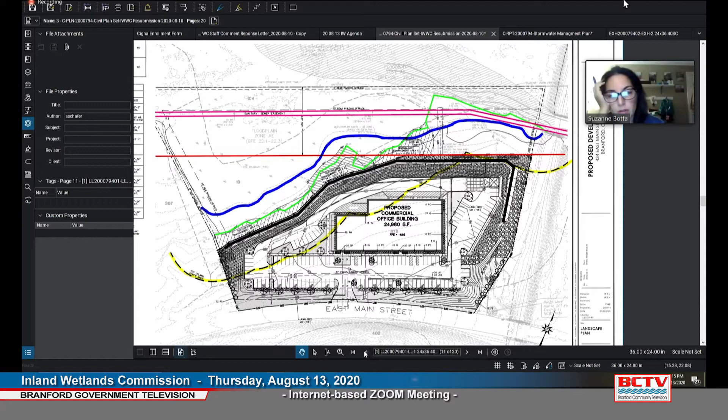Excuse me for a second. Sorry, this is Commissioner Botta. So you said deep sumps. Can you take the time and get more specific about what your stormwater management is, instead of saying things like deep sumps? If you would specify what is on the plan, that would be helpful.

Absolutely, Commissioner Botta. So I'm going to just move to the grading and drainage plan here. It's a little bit more clear. So we have a series of catch basins in the parking lot. This catches rainwater that falls directly onto the lot.

So catch basins, I'll just circle a couple of them, are here in yellow. So these are the first point of contact where rainwater falls from the pavement into the system. The catch basins are precast concrete structures that have pipes that lead to each other and eventually to this system. I'll just highlight those real quick for you guys. So piping here, here, here, sorry, a little crooked, and eventually discharges in this direction.

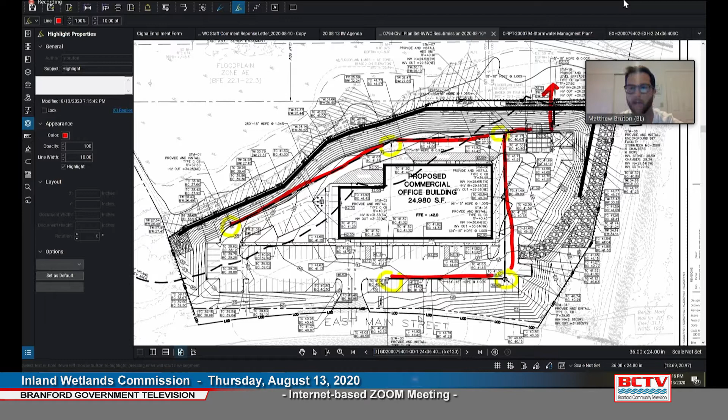What I mean by deep sumps and hoods is when the water falls into these structures, you want a space between where the inlet of the pipe is and the bottom of the structure. That is 4 feet deep. And I'm going to just try to find it on my details real quick to give you a better picture of what that looks like.

Let's see here. Sorry, going a little slow. Okay. Sorry, computer's spinning a little bit. Let's see. Okay. All right.

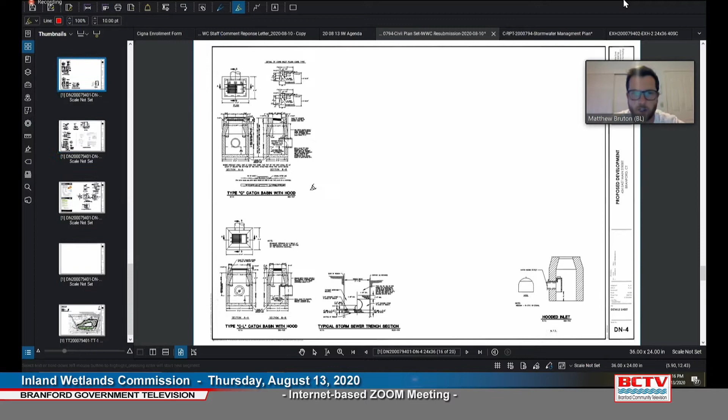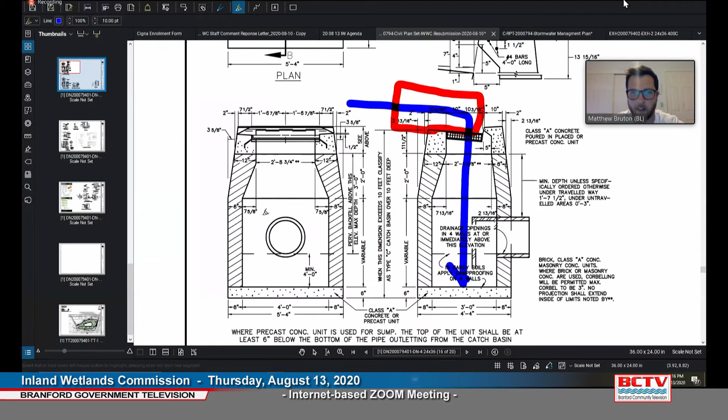So here's a cross section of a catch basin. So when you drive around commercial parking lots, you would see this right here. This is where your car would be parked next to a curb. Water in blue would come across the parking lot and fall down into this structure. What I mean by a sump is this area here, this area beneath the inlet that would fill up with water prior to it leaving through the pipe.

We have called this out as a 4-foot minimum. That is what's recommended by the Connecticut Stormwater Manual. This is a volume in an area that when stormwater falls into it, this is the first flush. You're getting trash, you're getting sand, you're getting salt, all of that you don't want migrating downstream. So the first line of defense is this sump.

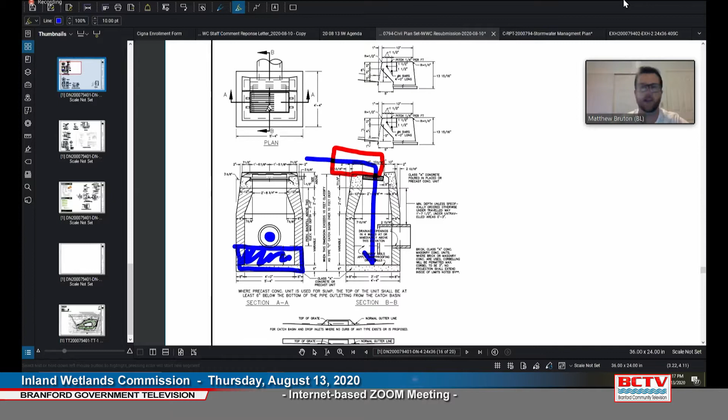This sump is going to capture those things, and this is an easy access point for the applicant to pop the grate on top and periodically suck out all that stuff as it builds up every season, spring, winter, fall, things of that nature. So that's what the sump is. The hood is also a feature that's part of this catch basin that helps keep the things that get trapped in the sump from migrating up and through the pipe and down the system. So that's actually highlighted here by this.

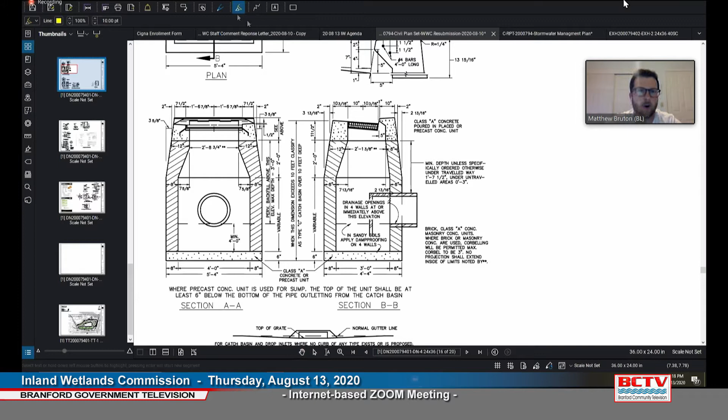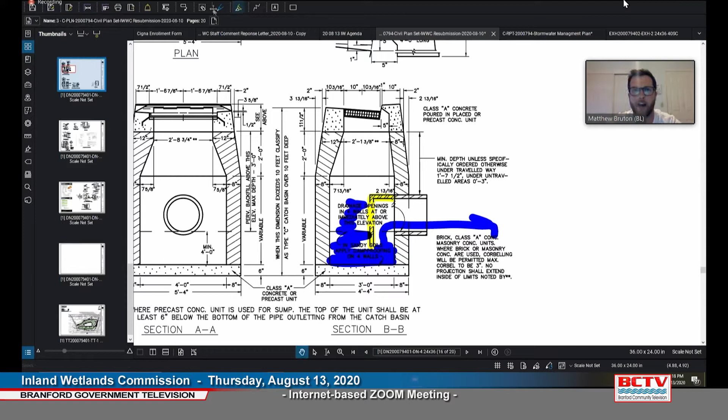So the goal of the sump is to obviously fill up with water. As it fills up, it'll spill and leave. This will obviously fill up quite high during storm events. And we all know that trash or leaves would float or fall to the bottom. The goal of this sump is to not have trash or anything that's floating to just flow out with the water as it fills into the catch basins. You get sediment along the bottom and you get trash, and it would be blocked by this hood.

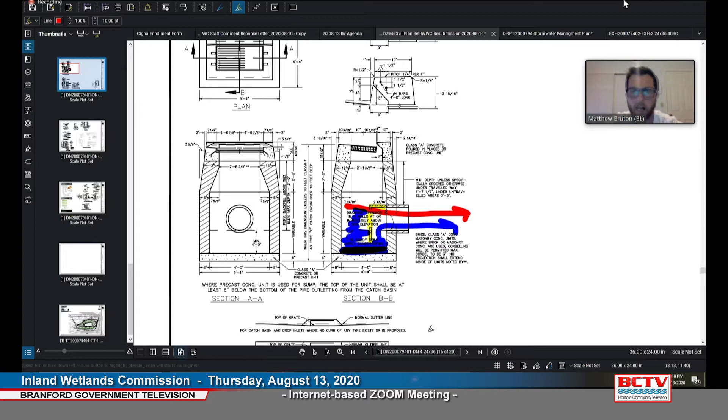So those two features of a catch basin are recommended by the Connecticut Stormwater Manual as the first line of defense on a stormwater management system. The next is I described a hydrodynamic separator. So this is another precast concrete structure that is put in the treatment train prior to getting to the subsurface drainage system. So you'll see here, water would be flowing in this direction and eventually out this direction.

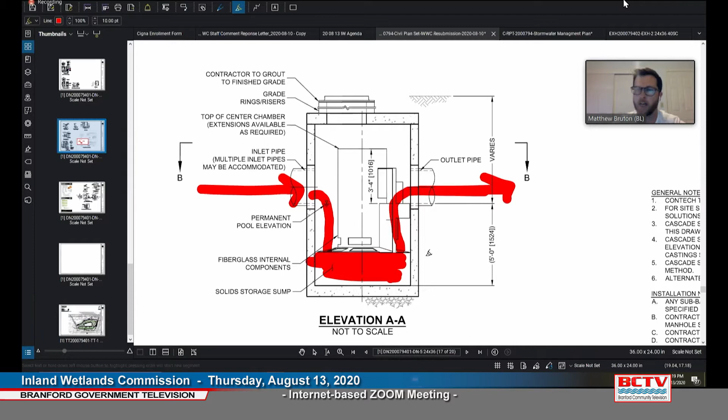The goal of this is similar to the sump. Water falls down in this and gets trapped in this area here to keep any sediment that has migrated through the system further than the sumps and the hoods and captures this in a greater quantity down here. And then water will rise and leave the system as well. So this is always a belt and suspenders system. Every device along the treatment train provides more and more quality to the water. So when it eventually discharges, it's clean.

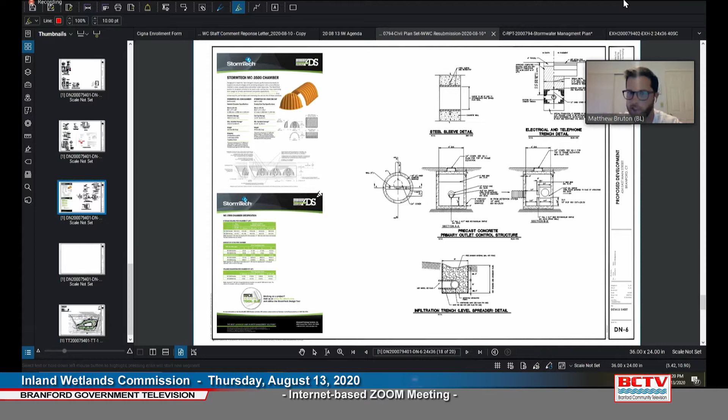And the clean that I'm speaking about is 80% TSS removal. TSS stands for total suspended solids. That is the standard that the state requires us to design our systems to. The last system is the underground detention system. It's underneath the parking lot. We're doing that to maximize the space on the lot to get the building and parking lot where we need it. So I'm going to just show the cut right here.

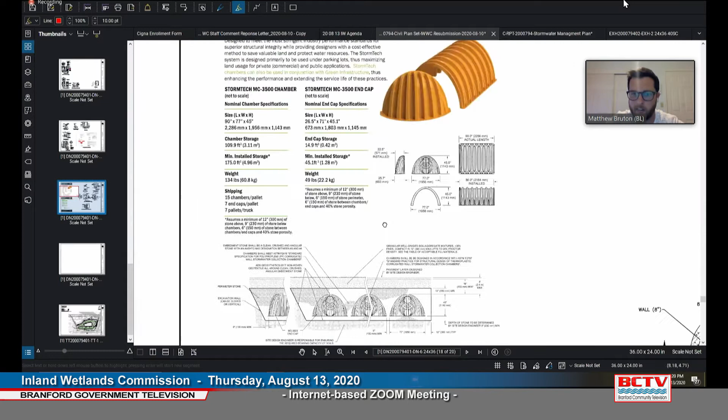So it's a chamber system that's shown isometrically here in yellow. So this would be the pavement where you would stand if you're a person, or a car, you could park here, and it would be beneath. So the water would flow into this system and fill up. The point of this system is truly peak flow mitigation.

We're adding pavement to the lot. So hypothetically, it's not mitigating into the soils as it does now. So we are not allowed to let water rush off this lot without capturing it and slowing it down. If we had residential abutters or commercial abutters, you'd obviously want this because you don't want to flood out your neighbor. You can't pave this and then just let it go and he's out of luck.

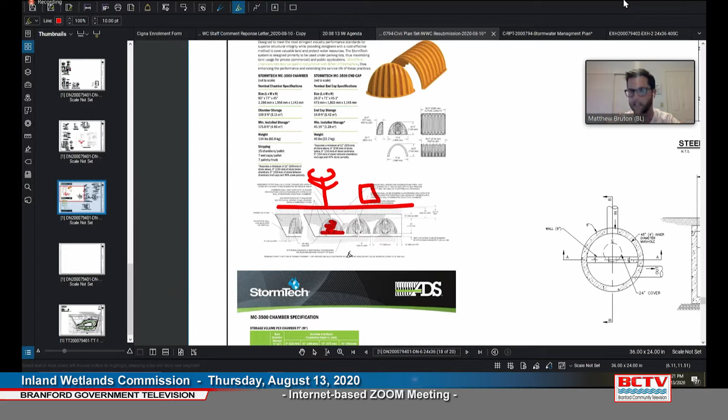In our case, obviously, it's not flowing to a developed lot, it's flowing to the wetland of the river. The goal of this is obviously to not drown out the wetland of the river. You want to match those peak flows so the wildlife, the vegetation, all that stuff gets the water that it's historically gotten, and you're not going to wash anything out from an erosion standpoint. So I'll flick back to the grading and drainage plan, Commissioner, so I can show you where each of these components are.

Ooh, too far. Oh, sorry. Trigger happy today. Oh.

Okay, so the catch basins with the deep sumps and hoods are circled in yellow. The last hydrodynamic separator is the structure right before the underground system. So you got catch basins and sumps, pipes, hydrodynamic separator, and then I will change colors here. This is the size and volume of the underground system. From there, it's piped out to the level spreader.

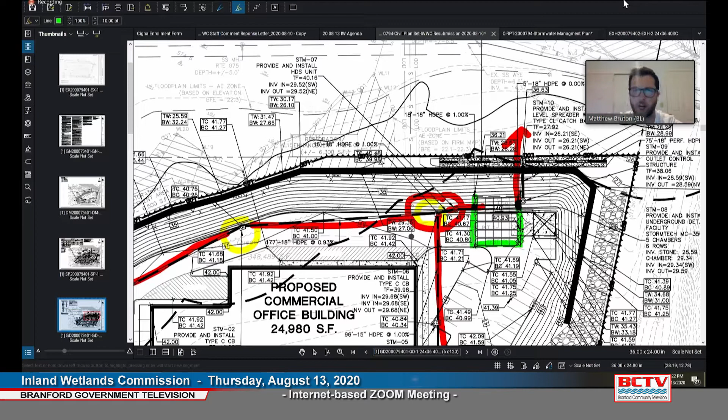The level spreader is a device that takes a point discharge from a pipe. Water would be rushing out of this system. You don't want that. You don't want this point system because it'll cause erosion as water sheet flows to the river into the wetland. You want to spread this out so water is dispersed evenly and not causing any erosion issues, especially at the bottom of a retaining wall, especially in a landscaped area adjacent to a wetland.

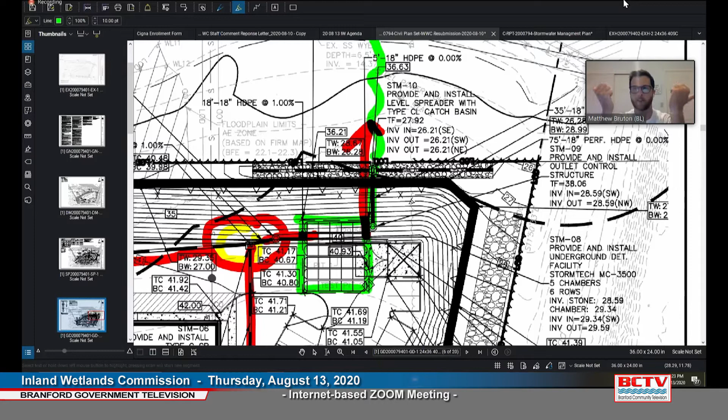So as water discharges this underground system, it comes to this structure here. It's going to go left and it's going to go right. This is a perforated pipe and a stone trench. So water will go left and right. Once this pipe fills up, the water is going to bubble up to the surface and then trickle down to the wetland. So that is the system at the base of the retaining wall here. All of these things, Commissioner Boda, comply with Connecticut Stormwater Manual and your local regulations for stormwater management. Does that answer your question?

It's more specific. So I'm assuming you're going to continue. I'm wondering about any infiltration that you are planning on the site. Yes, good question. Yeah, so during our initial discussions, I believe with this board and the town, we were looking at infiltration practices to recharge groundwater.

That's a common request. It's great to do if it's possible, but it all depends on topography, soil types, and historical high groundwater. So before we got into this design, we did test pits on site with the applicant to see where groundwater was. They were done in the proposed location we are shown here of where our subsurface infiltration system is. Based on those test pits, and obviously with a gut check of being next to a river and also next to a wetland, the groundwater was discovered at 27 feet of elevation.

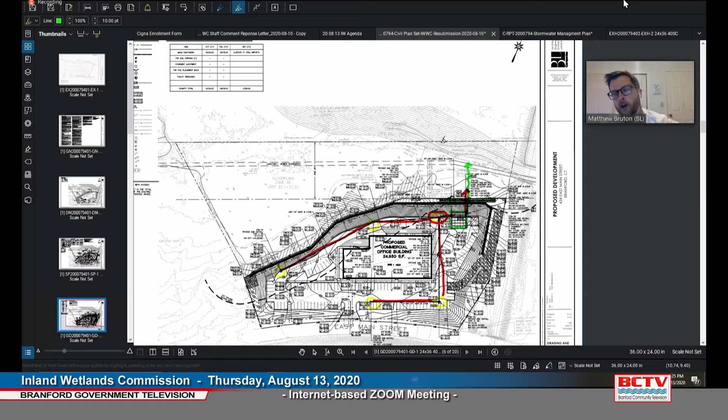And you said, this is Commissioner Boda, you said the test pits that you did were exclusively in the northeastern portion of the property? Correct. We did them all roughly in this area here. And we did that because the Connecticut Stormwater Manual wants us to not only clean stormwater and mitigate peak flows, but they want you to match discharge points.

So all the water, as I explained earlier, right, we have elevation 40 by the street and 20 at the rear of the lot. In general, everything goes this way. So testing along the front doesn't really do anything because water needs to discharge in this area here. And if you put a system in the front, you're not going to be able to get it to the back. So everything needs to be done along the rear of the lot to get it to its eventual home, which is the wetland and the river. And we obviously didn't want to go into the wetland to disturb any of that. And obviously, you guys know wetlands, water is either at the surface or right below the surface.

You can, this is Commissioner Boda. You can continue. I'm not sure where you were gonna go next, but we'll have more questions later.

No problem. So just continuing on, part of our set also, which would be important to this board, we did provide sediment and erosion control plans and a narrative. So these are devices that would be installed during construction to protect the street, the wetlands, any existing systems adjacent to the property from erosion during construction.

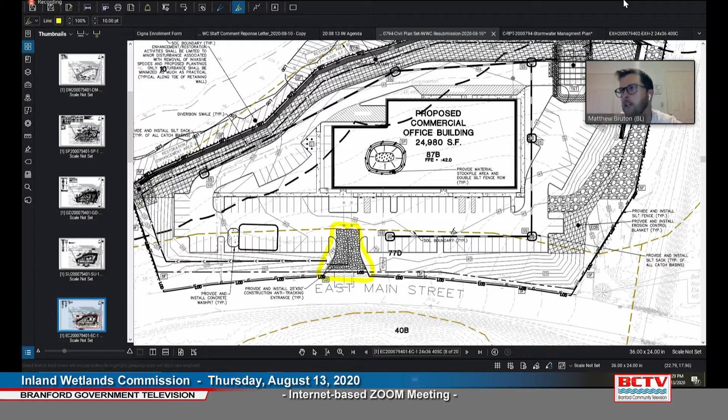We've also provided erosion control blankets. These are temporary stabilization methods that are rolled out onto slopes. We show them here by this cross pattern. So we show them in areas of 3 to 1 because that's obviously an area that's prime for erosion because of the steep nature of the slope.

These are blankets that are laid out to capture and keep soil from moving until vegetation can grow in. So we have proposed those in several locations on site in the areas of proposed steep slopes to make sure soil does not move during construction.

Another item. Excuse me, this is Commissioner Boda, can you clarify the erosion control blankets? What kind are you using? What is the material that the erosion control blankets are made out of? Let's see here. Let me see if I have it here.

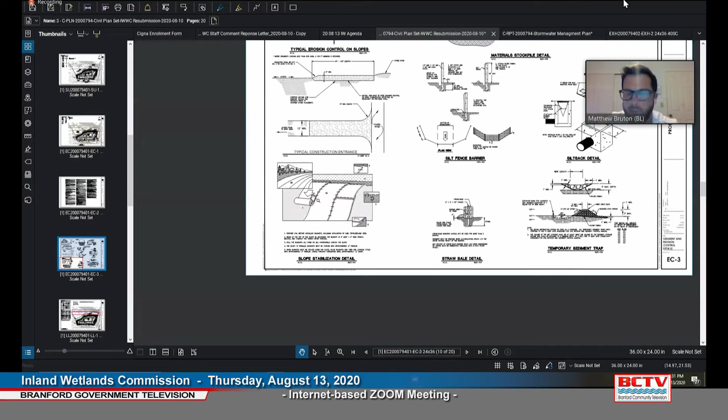So here's a detail on sheet EC3. This kind of gives you an idea of how they're installed in a 3D fashion, right? So they're blankets that are rolled down the slope, overlapping and stapled together in a pattern similar to this. That would remain until everything is stabilized. Let me see if I can find the type.

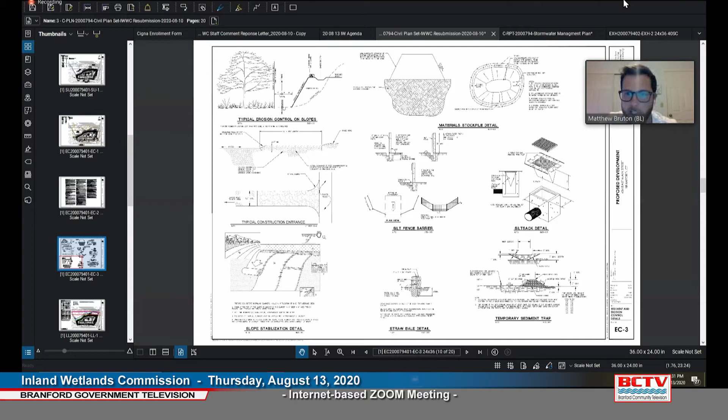There's obviously dozens of different manufacturers and products and companies that provide different things. I don't know off the top of my head, Commissioner Boda, but I can surely find it for you by the end of the meeting if you don't mind. That works. Commissioner Boda. Okay.

Again, while I've interrupted you, if you would talk a little bit about the maintenance schedule, you said periodically, and if you would clarify what you mean by periodically, including the anti-tracking pad and the silt sacks, what triggers cleaning out, and then generally what is the maintenance schedule?

Yep, absolutely. Great question. I am flicking now to our stormwater management report. That is, you see down here, almost 300 pages. The first half of it is the stormwater calculations that the town engineer reviewed in terms of peak flow mitigation and things of that nature.

The back of it, we provide a stormwater operation and maintenance plan. So this is a plan that is followed during construction and also should be followed by the owner applicant moving forward after the site is constructed. So let me just skip through here. So there's a brief narrative on the description of what I'm speaking about in the plans that you saw right now. But I'm going to skip forward a little bit here.

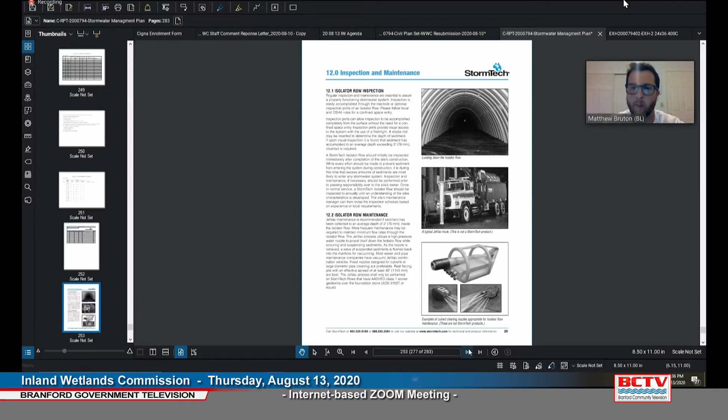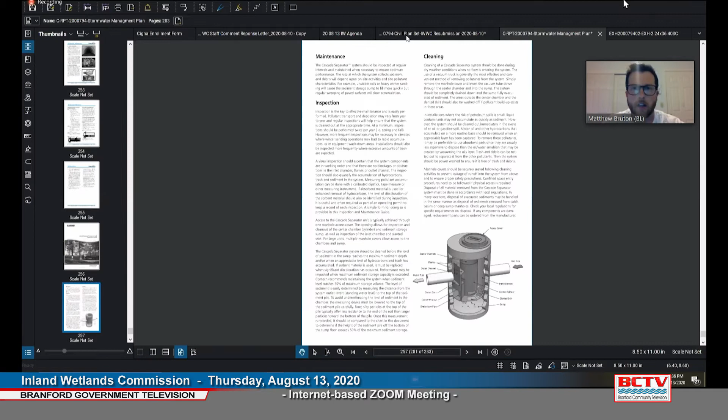This is a cut sheet from the inspection and maintenance manual for StormTech, which is the chambers beneath us, some of the devices that are used to clean and jet out that system per manufacturer's recommendations. Same thing with the hydrodynamic separator. Right, some of the devices here, manufacturer recommendations. If I go back to the plans, I will show you something else as well.

All right, so this is a detailed narrative. It has items like construction sequence, operation and maintenance requirements, grading operations, maintenance of sediment and erosion control measures. So I'll just read out a couple sections if this will be helpful, Commissioner Boda.

Siltation fences shall be inspected minimum weekly or after each rainfall event. All deteriorated fabric and damaged posts shall be replaced and properly repositioned in accordance with this plan. Sediment depositions shall be removed from behind the fence when they reach a maximum height of 1 foot. Talking about the same thing with hay bales, talking about sediment traps. What else is a good system here to point out?

Excuse me, Commissioner Baxter. Are you reading from EC2? I am reading from EC2. If everyone wants to follow along, I know I'm kind of moving pretty quickly with my mouse.

Last note: maintain all permanent and temporary erosion and sedimentation control devices in effective condition throughout the construction period. Upon completion of work, sweep parking lot, remove all temporary erosion and sediment control devices when authorized by the authority having jurisdiction. So in this case, we would be coordinating with Jamie to make sure this site is stabilized not only in our eyes, but also in the jurisdiction's eyes. So nothing is prematurely pulled out, which would allow erosion to happen and damage wetlands downstream.

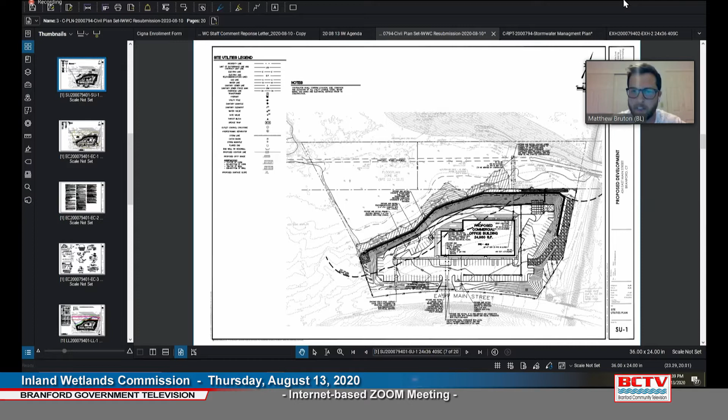Let's see. In terms of utilities, all the available utilities, water, sewer, gas, electric, telephone are available either in the street or on site. Most of the utilities are connected to East Main Street with the exception of sanitary sewer. There are no sanitary sewer services in East Main Street. If you remember from the beginning of my presentation, there's a sanitary sewer easement that runs along the back of the property. We are showing a connection back here.

It is ringed with erosion control devices, and it does stay outside of the wetland. So we are not proposing any direct wetland impacts for this connection. Obviously, if we connected in any other way, here, we'd be cutting through the wetlands. Nobody wants that. We know that would never fly. So we found a location that stayed within the upland review area and reached that connection point. Just wanted to point that out to you guys.

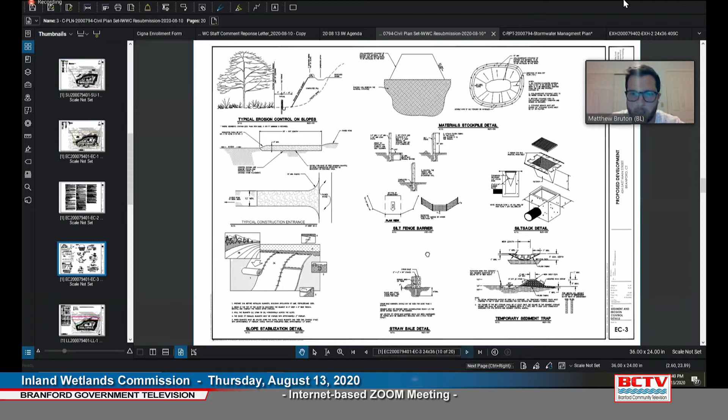I'll let David Lord speak to this when we get to him. We also have provided restoration areas, I believe, which were talked about potentially during the site walk, along the base of the wall, between the base of the wall and the wetland area, that's depicted by an enhancement area here, here, and here. So that's my quick-ish presentation.

Just want to recap, we have no direct wetland impacts. We are in the upland review area where we are severely hobbled by some existing conditions on the site in terms of easements, wetlands, FEMA flood areas, and we're matching the constraints of your regulations in terms of maximum height of retaining walls and slopes. We think this is a great use of the property that really only 50% can be used in a commercial district. I'm happy to answer any questions, but I'm sure you do want to speak as well to the applicants and the wetland scientist. So I will leave the plan up and stop talking.

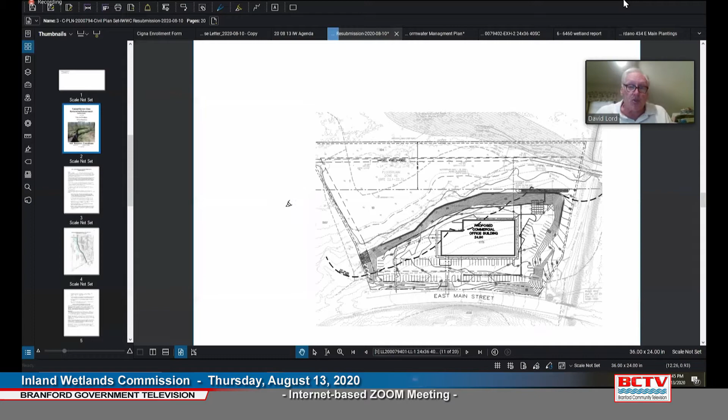I've called out 3 separate restoration areas, basically due to their difference in existing vegetative cover, their location relative to the utility line right-of-way, where we have some height restrictions, and the center restoration area, which is restoration area B. We're also proposing to take some invasives out of the existing wetland vegetation and plant some native shrub species as well as tree species into those areas.

Beginning on the second page of the plan, there's a construction sequence which follows step by step how these areas will be restored or enhanced. I'll give you a short overview of that sequence. In the areas we will go in, I will mark all of the invasive plant species that are to be removed. The removal will be done by hand. We're attempting to minimize the disturbance of soil.

The existing trees and shrubs will be cut off at the ground. The root systems will be left in place. They will be treated with a systemic herbicide to kill the root system to prevent regrowth of the invasive species. And then in existing open portions of the restoration area, such as that grass area that's on the cover of the plan, is where we'll be doing the plantings of the trees and shrubs, which we'll get to in a moment.

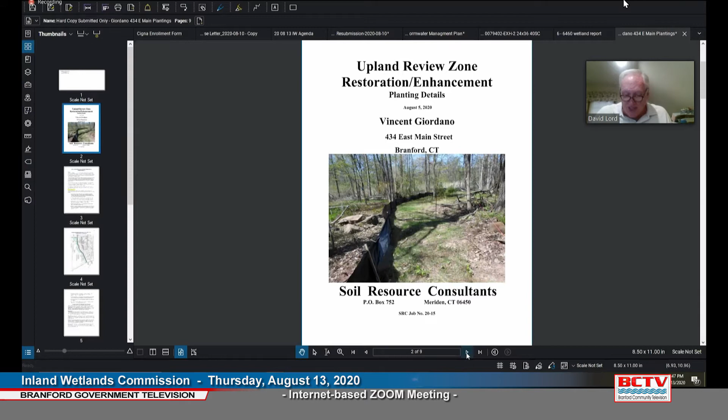The 3 areas that are proposed for restoration enhancement are shown on page 2 in the green crosshatched area. On page 3, there's a description of the 3 planting areas A, B, and C, and a description of how the tree and shrub species were selected for this project. And on page 4, there's 3 columns, A, B, and C, which shows you species composition, height of the plant to be used on this site, and the numbers in each of the restoration areas.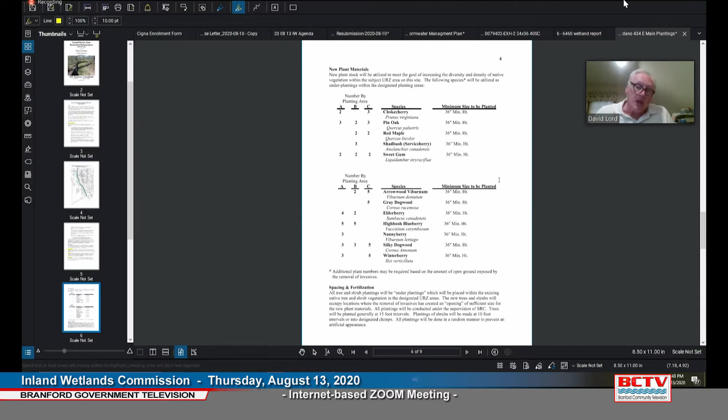Now, one difference in this particular type of restoration plan, we may need to use additional plants of these species based on the number of invasives that we encounter in each of the restoration areas. I have not done a detailed inventory of how many individual invasives we're going to be pulling out. I have this list prepared on page 4 to give the commission an idea of what we're proposing in each of those areas, and for lack of a better description, a minimum amount of trees and shrubs that will be put into each of those restoration enhancement areas.

It's quite possible that additional trees and shrubs will be needed in each of those restoration areas, again, based on the number of invasives that we'll be taking out of each of the 3 areas. You have spacing and fertilization recommendations. On page 5, you have permanent and temporary vegetative stabilization seed mixes, which will be used for bare soil areas, which we are proposing to keep to a minimum in the removal of the invasives and the planting of the new species. There is a description narrative of the New England Conservation Wildlife Mix, which is the long-term no maintenance seed mix, which we will be putting into the enhancement areas.

And lastly, there's a maintenance and monitoring program similar to other plans I presented to this commission, with the exception that this one has more details on how the invasives will be removed prior to the planting that is proposed within the different areas. Your standard requirements for these types of plans are the inspection, sequence, and monitoring period of time, and the minimum threshold of 85% for all trees, shrubs, and ground cover that are planted in here to be maintained throughout the life of the post-completion inspection period.

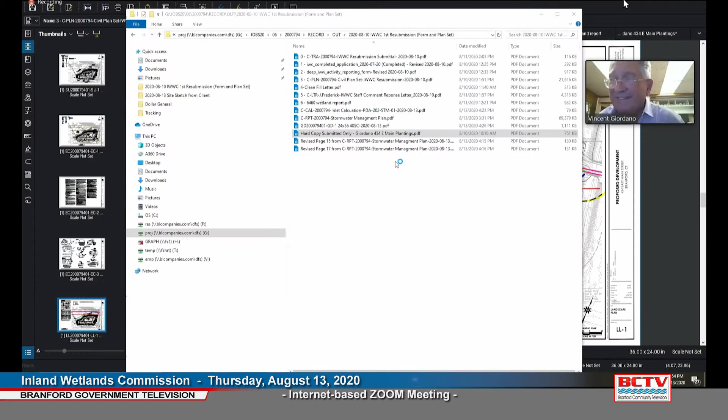This is Commissioner Basserman. Mr. Giordano, the large mound, a large pile of soil that is on the site, can you speak to the condition of that material? That material is virgin red rock type material, sandy, reddish rock material that's been pulverized. 100% of it came from Prospect Hill over at Yale University during the development of the Yale Science Building. We were the site contractors on that particular building that has just been completed and opened.

We had to excavate and remove a total of 120,000 cubic yards of all this red rock virgin material in order to get the two-level sub-basement for the new building in. A portion of it came to this site. The vast majority of it went to other sites around the city and even Yale-owned sites. Like I say, it's all certified virgin, clean material.

And I assume, this is Commissioner Bassman, that the letter that I'm looking at on the screen attests to that clean fill? That's correct. Okay. Thank you. We couldn't move it. Like I said, it was 120,000 yards that went off site, and we couldn't move any of it to the locations without this type of analysis and certification for that fill. Thank you.

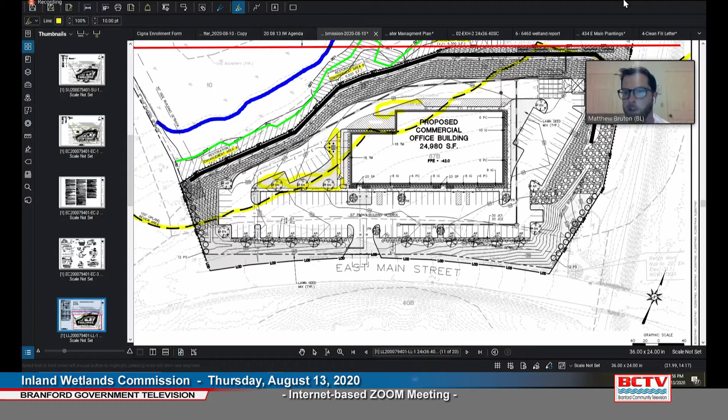There's a large one in this corner here between the loading spaces, and also a wedge here against the building. There's also small landscaped areas along the perimeter as well. As we all know, living in New England, if there's a massive storm that does require extra snow to be stored, we do have a small excess of parking spaces, so those could be used as well. If it's a monumental task with snow that inhibits use of the property, the applicant would look to possibly collect it and move it off-site.

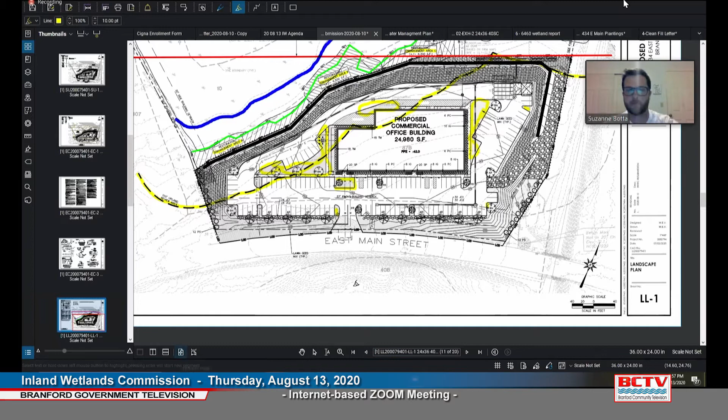This is Commissioner Botta, is that documented on your plan? Let me see. It's a response in our letter back to town staff. Let me just see if it's on this plan here.

I don't know if it's specifically called out on a plan, but it's in writing to the letter responding back to Jamie. A note can surely be added to the plans though, if that's required.

Yeah. This is Vincent Giordano again. I can also speak to the emergency requirement to remove snow from our properties. As you know, we own Branford Building Supplies here in town, and with all the lumber piles and everything else there, there's very little room to store snow. So we always have the facility and the ability to remove snow from the properties if that becomes the requirement. On a site like this, there are a number of areas, but if we have to move it, we move it.

Yeah, so this is Commissioner Botta. I don't think the general practice of needing to remove snow from the site is... Right. That's what I'm getting at. It's more an issue of ensuring that it's not pushed back to the northeastern section of the site, and so as Mr. Bruton just mentioned, if it's going to be in those landscaped areas, that would be added to the application, the site plan. That's helpful to have so that it's documented.

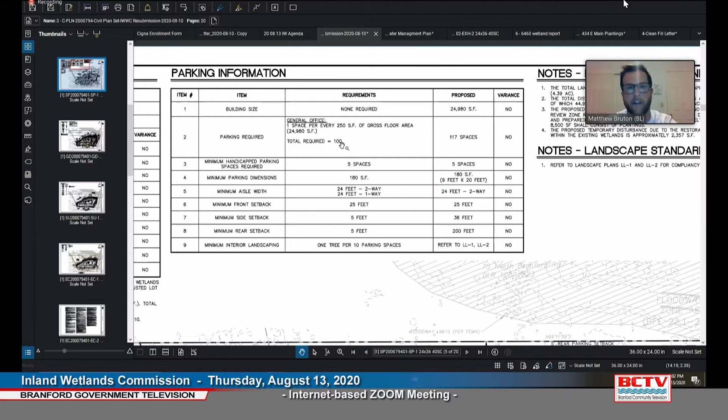We are providing 117. Based on the fact that we don't have a defined signed tenant at this time, we are asking to leave the little bit of excess parking spaces as our ability to attract a vibrant business or businesses to the lot. We understand that it is slightly above requirements, but since we don't know who the end user will be, we're looking for a little bit of flexibility to make sure we can attract a viable business to this site. Obviously, in the future, if the building shrinks or tenants are vacant or that demand is not needed, we could remove spaces as necessary.

Commissioner Botta. I think the likelihood of that parking ever going back seems exceptionally unlikely. And so I am wondering if you might consider doing a reserve that is potentially more pervious than not, something like pavers, that would allow any potential tenant to see that this is a space that could be converted into parking, but at the same time, we are minimizing the impervious if it's really not necessary.

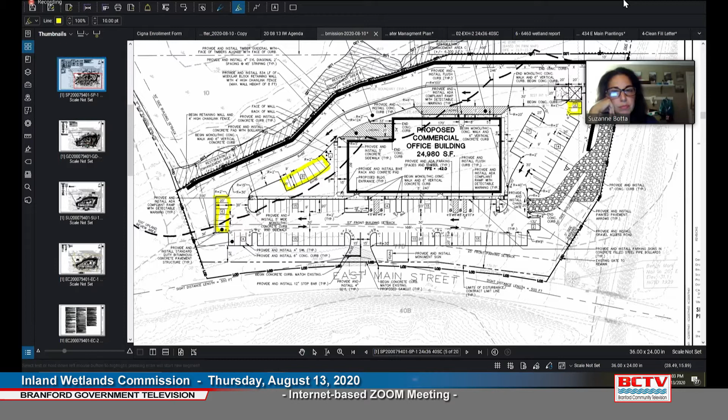Vincent, are you okay with that? I think we could definitely designate some areas that are farthest from the building that could be shown as future parking if needed and left in the natural landscaped setting for now, unless they're needed. In the meantime, they'd be green space as Commissioner Botta is requesting. This is Vincent Giordano. Matt and Commissioner Botta, I have no problem with showing that. Good. I think I'm okay for now.

This is Commissioner Basserman. Mr. Bruton, can you talk a little bit about this diversion berm? Looks like it's going to be put in as part of the construction sequencing. Yeah, so you're looking at EC1? Correct. One second. Oh, too far. So again, Matt Bruton, engineer from BL Companies for the record. What we call out here is this diversion swale. I'll highlight it in color here so it pops for you guys. So it's lined in this fashion.

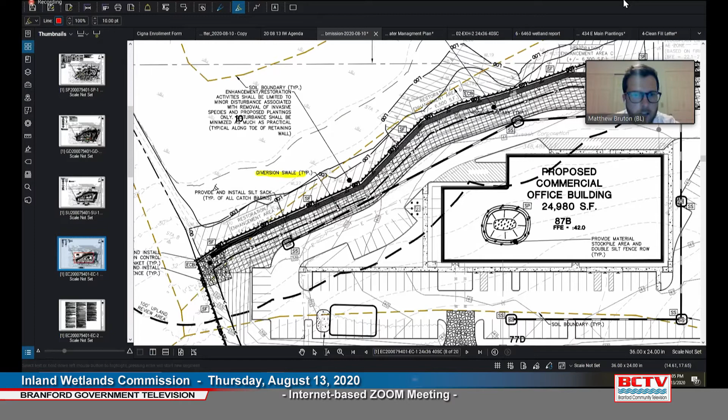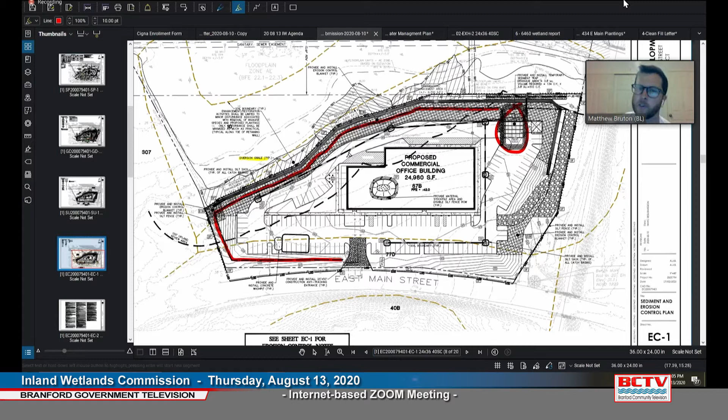So as you are aware, we're proposing to fill the rear of the lot by constructing this retaining wall, raising the back of the site up to make a level pad. So we have a retaining wall, 3-to-1 slope up to the paved area. Eventually, when that is further along and the stormwater system is in place, that would be used to capture rainwater that falls during construction to clean it and mitigate it and discharge it to the appropriate spots.

But before that happens, between clearing of the land and as the lot is being raised with earthwork, you want to make sure water is being diverted to correct spaces, captured and treated and cleaned before the structural devices are installed. So what we show here is a diversion swale. That is a rough grading that would be put in as the lot is filled up and the retaining wall is constructed. It'll do two things. It'll keep water from getting towards the retaining wall, so Mr. Giordano can actually construct the wall, but it'll also divert the water to a temporary sediment basin.

The goal of this basin, as you see here, is temporary. It's sized based on the drainage area that flows to it, and it's sized based on the Connecticut Stormwater Manual. So this is a basin that would be temporary in nature. It would be installed and modified as the site is raised up. And the goal of it is to collect sediment-laden stormwater, divert it to this basin so it can be settled out, and then clean water can be discharged downside of the wall back towards the wetlands and the river during construction.

Once the site is raised completely and the catch basins are installed, that would then take over as the means and methods to get stormwater out of the parking lot and back to the wetlands. So it's a temporary situation between construction and completion.

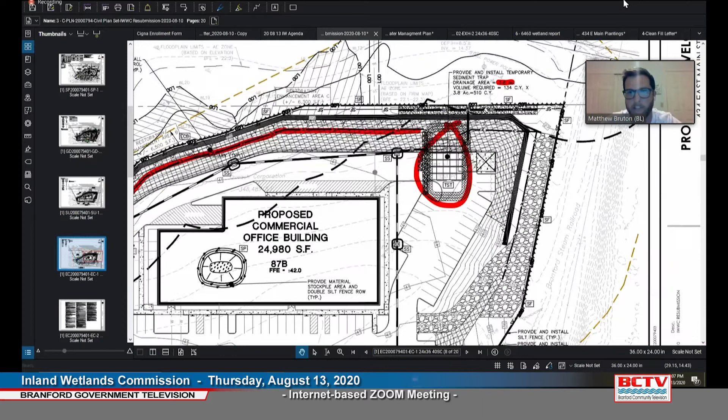Yes. So this will obviously depend on how the lot is raised and in what stages. To me, this is an area that would work as things are starting to be raised, but as the wall is constructed in this area, this diversion swale will be the main track to get water to this temporary sediment basin. So this is almost like an initial phase one to get some of this area stabilized. And then as the wall is constructed and the site is raised, the red line will take over as the main means to divert water to the temporary sediment basin.

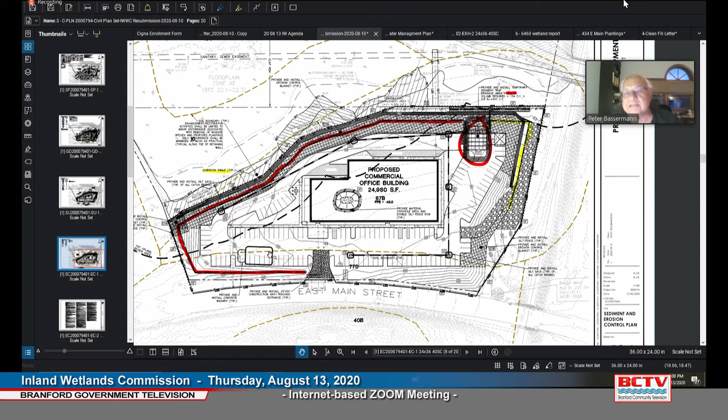This is Commissioner Bassermann. Do I understand that basin gets filled in when the wall has been completed? Is that what happens? Correct. Once the wall is completed and the earthwork is set, then we'll end up with this final condition here where the basin was roughly in this area here. That will be removed, filled in. You'll have paved, sloped landscaping, and the catch basins and piping will take over as the stormwater management system on site. Thank you. You're welcome.

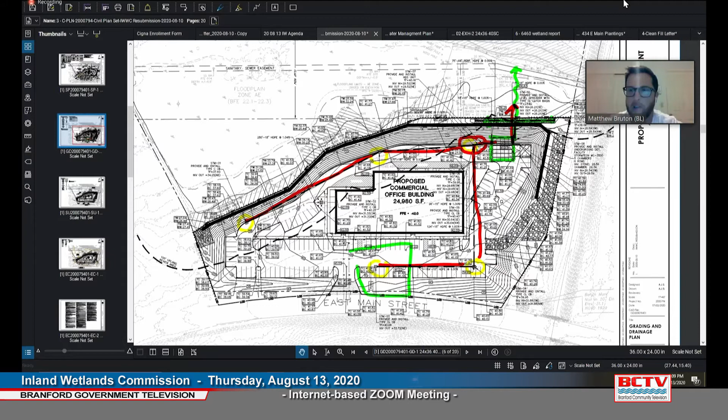This is Commissioner Begemon. A question about two things, and I don't know if it's appropriate to ask as I'm a new commissioner, but regarding the removal of invasives, which sounds like a good idea, the systemic herbicide that is proposed, what is that? Because we're right near a wetlands, and it's glyphosate probably. I want to know about that. And the second question is regarding the dumpster area. Dumpsters attract a lot of debris, and it's right at the top of the wall, and I don't know if there's something protecting debris from going down the hill from the dumpster area.

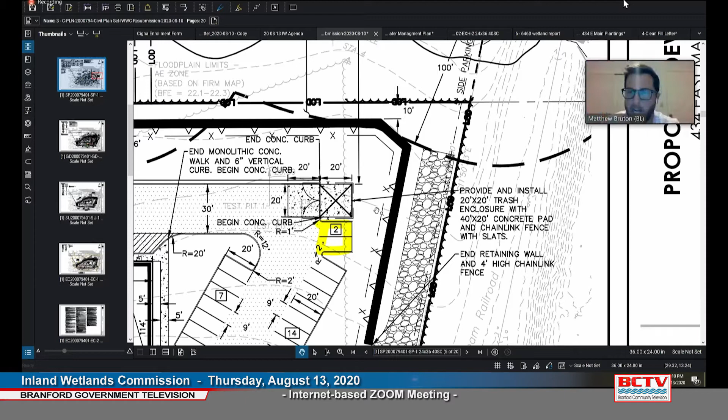I'll start with number two, and then David could do number one. Commissioner, the dumpster enclosure is here in this corner. It's a 20 by 20 trash enclosure on a concrete pad. It's enclosed with a chain link fence with vinyl slats. It's at the back of the lot because usually it's the most unappealing thing that towns do not want to see in the front yard. But it is enclosed with gates and a fence, so the dumpster would fit inside here. So the fence and the gate would act as a deterrent from debris blowing out of the dumpster and into the parking lot and potentially off-site down into the wetlands.

Jaymie Frederick, the wetland agent. It's my understanding that there will also be a chain link fence along the top of the retaining wall. Is that correct?

Matt Bruton from BL, yes, that is correct. I'll just quickly highlight that here. This little dash X line is along the retaining wall. It does two things: keeps trash from blowing over the top of the edge, and also keeps people from falling off over the top of the edge. So it's a win-win for everybody.

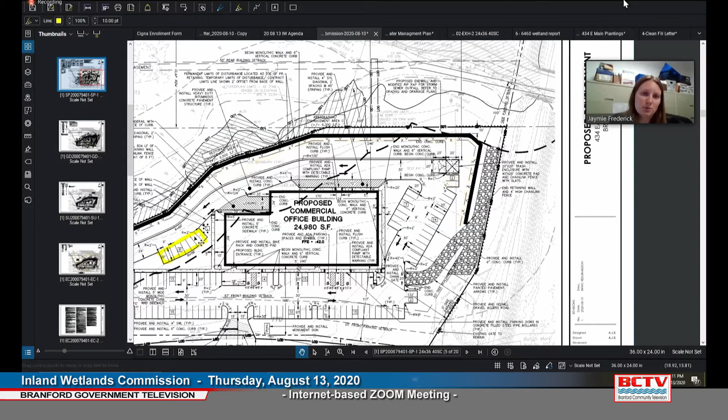Jaymie Frederick, the wetland agent. To go with Clarice's other question regarding the invasives management, do the areas extend into the wetland areas that are proposed to be enhanced? And is there any different treatment as far as seeding or plantings of the upland area versus the inland wetland area?

The herbicide that's proposed to be used is one that is licensed by the state of Connecticut, registered or labeled for use in this particular situation for this particular control mechanism. What we are attempting to do with the use of that is to minimize ground disturbance in the area where we are removing the invasives. There are mechanical means where we can get in and remove larger parts of the plant. Unfortunately, that equates to a larger earth disturbance.

So we're trying to minimize earth disturbance, cutting off the top growth, using the systemic herbicide, which kills the entire root system, but does not translocate outside of the root zone into the adjacent soil areas. It's very localized. It moves through the plant. It's absorbed by the cut surfaces, moves through the plant and kills the plant, but does not translocate out into the adjacent soils. Again, it would be done by a licensed professional applicator.

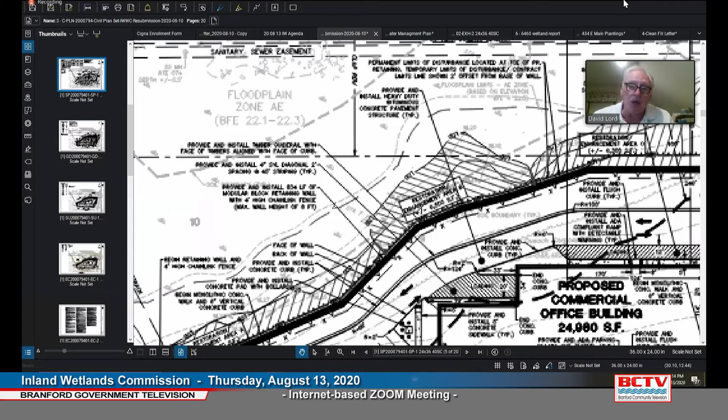The small number of invasive species that are within the wetland area in Restoration Area B, we can deal with by hand. If the commission would like, we can preclude any use of pesticides within the wetland portion of Restoration Area B. It's a very small area, but it is one that does have some invasives in it, does have some need for control. We can attempt to do that mechanically, continued removal of regrowth of stems during the 5-year post-completion monitoring period.

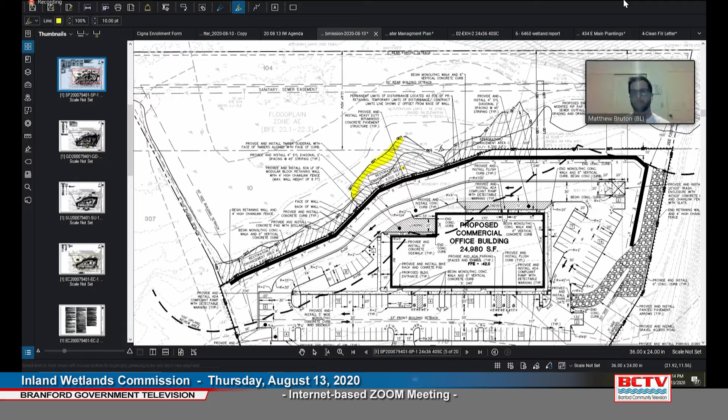Any other questions, Commissioner Bassermann? Any other questions from the commission? Commissioner Bassermann, again, this is actionable this evening, Jaymie? Jaymie Frederick, the wetland agent. It is actionable if the commission wants to move forward. It can also be continued to the next meeting, September 10th. It's up to the commission. The deadline without an extension is September 11th.

Mr. Chairman, Matt Bruton again for the record. As engineer, I know my applicant is very happy to work with the town on all items to make this project something that the Inland Wetland Commission is comfortable approving. Given the state of the soil stockpile as it is today, we'd love to get an approval from you tonight so that we can move on to planning and zoning to eventually develop this site and secure it more, so we could protect the adjacent areas and make this an economic driver for the vacant lot. So that's my 2 cents.

Right, and this is Vincent Giordano speaking here, and I would also second that, Matt. The pile's been there since 2017, and we've been able to keep it stable, and we've worked very hard at that. But there is a point in time where we certainly don't want to lose control of what's there. So the sooner we can get this approved and get moving on stabilizing or restabilizing that site, I think we're all better off. And as I said earlier, the timing is important for marketability as well. So it's a combination of aesthetics and also just site control and stabilization.

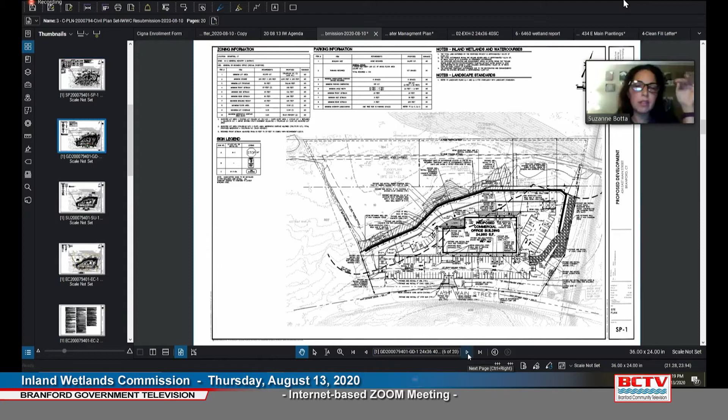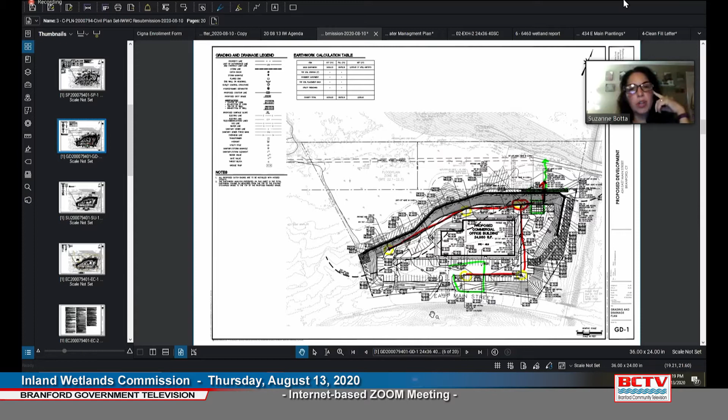This is Commissioner Botta. I have one more question, and it's really a curiosity. I'm wondering about the temporary sediment trap, and why we didn't consider something above ground or open in the end for long-term sediment and erosion control. So that's stuck in my head, and I'm curious about why everything was really pushed underground and tucked away until it's off-site. And I think that the state has really encouraged the daylighting of a lot of that stuff. So I'm wondering about the thinking behind that decision.

Sure. Again, Matt Bruton, engineer from BL Companies for the record. So the above ground basin, Commissioner Botta, obviously you can see that this is the temporary basin just circled here. That is an area in the final condition that would severely limit the development of this lot. An above ground basin could not go in this location. We have a retaining wall with an 8-foot max height here. We have a 3-to-1 slope here. That basin could not go in this direct location in the final condition.

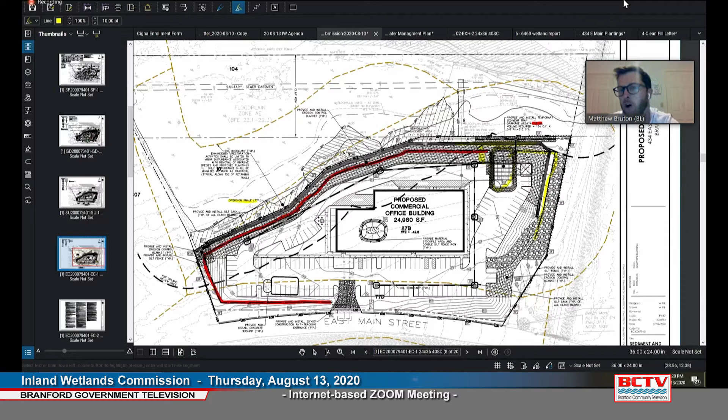It would have to be pulled further back off the wall and further off the slope that we're creating this flat pad site with. And doing so would also limit the size of the building and the number of parking spaces that we're allowed to provide. Based on the fact that 40-50% of this lot is already undeveloped because of the restrictions with the river, the wetlands, and the CL&P and sanitary easements, the applicant is obviously trying to make this project economically feasible by maximizing the usable area of the site to the best of his ability. Putting an above ground basin takes away from some of the area that we can develop.

With that said, the stormwater management system that we are providing, although it is underground, does meet the standards of a Connecticut stormwater management system that is required by the state in terms of water quality and peak flow mitigation. It's typically used when there's tight sites, especially something of this nature, where there's high groundwater adjacent to a wetlands, adjacent to a river, when you're trying to balance economics as well. I'm not sure if that addresses your question or not. It does. It answers my question.

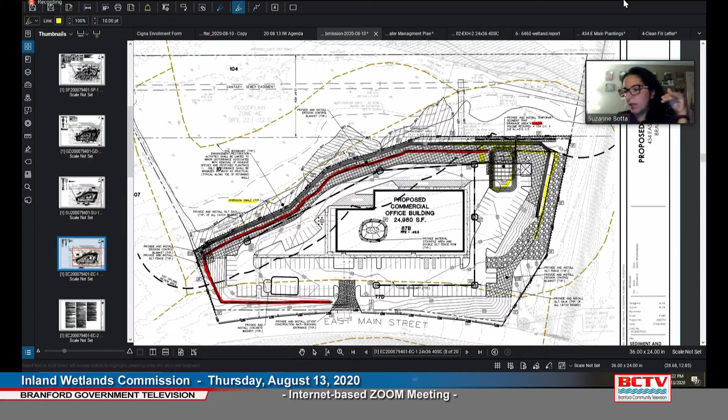This is Commissioner Botta. I feel relatively comfortable with the application. I think maybe can you talk a little bit about, and maybe we can pull up the peak flow, I would like to take a look at that. And do you have a hydrograph for the site in the plan? I can definitely find a chart really quickly. Hold on 1 second. A lot of pages there. Yeah, yeah. Let's see.

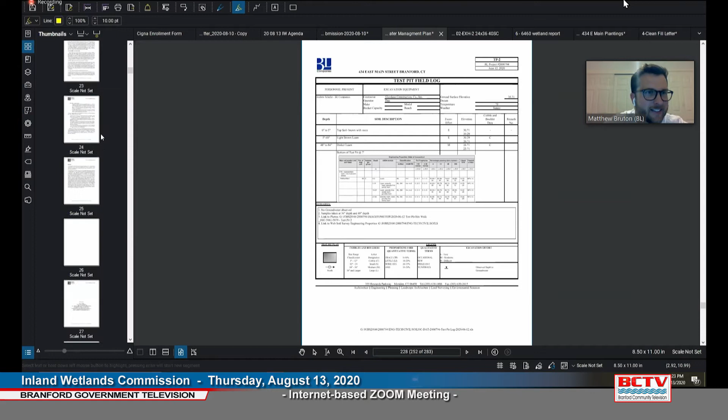So in the existing conditions... I just want to ask you a question before you continue. For your existing calculation, what did you put in for the ground cover? What did you use as the existing surface conditions? Yep, let me see if I can find that real quick for you. Stuck here, hold on.

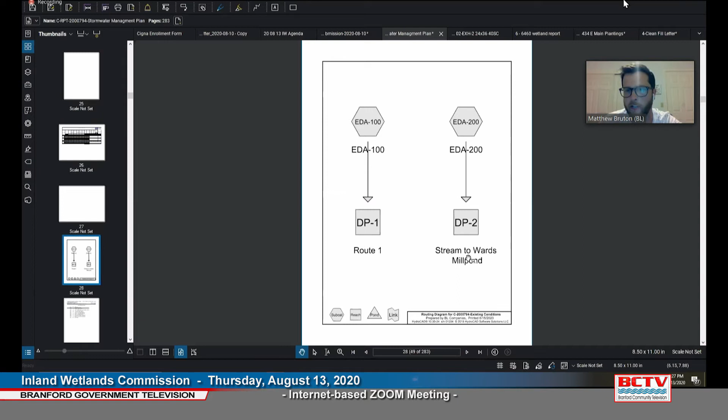So description of nodes here. So this is the variety of the ground cover that we have. Obviously, the largest area, we have anything from brush to gravel surfaces to a meadow non-grazed area. We have some pavement in the front, and then also we have wooded areas as well. The HSG, the hydrologic soil group, that is a description of the soil based on Web Soil Survey. It's a website that's put on by the government to classify soil types in the area.

So the HSG B, C, or D is in reference to the types of soils that are present on site, A being the best type of infiltration soil, D being the worst type of soil. So you can see that we have a variety of anything from B to D, depending on where we are on site. So this is the breakdown, Commissioner Botta, of the surface types. Let's see, computer is doing better now.

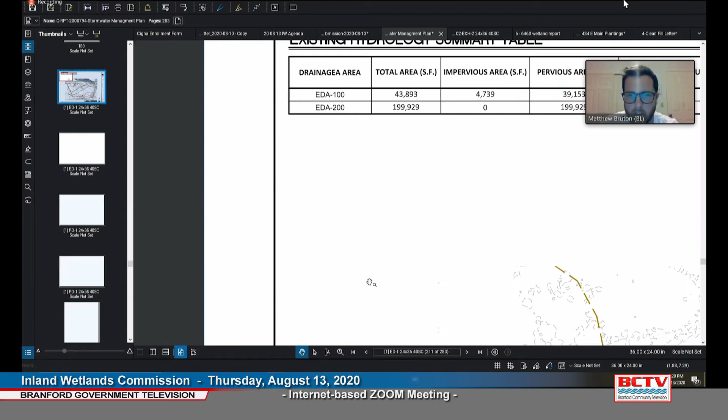I'm just looking for one more map I think would be helpful if I can find it. So here are the areas, right? So there's a small area that's depicted as EDA-100. That goes to the front area here. And then EDA-200 is the remaining area that heads back towards the wetland and the river. So we have some breakdowns here of total area, impervious area, pervious area, times of concentration. I don't know if that answers your question, Commissioner Botta. Yes.

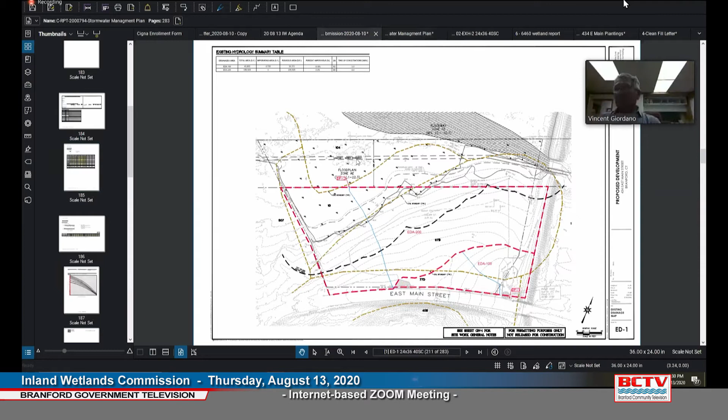Commissioner Bassam, is the commission satisfied with the conditions that have been laid out in the application? And are there additional conditions that any commissioner wants to suggest at this point? Well, this is Commissioner Boda. So what we had talked about this evening was putting those 17 spots into almost a kind of in-between reserve, with pavers or something to just make it more pervious.

The snow piling into the maintenance plan, using erosion control blankets that are made with material that breaks down as opposed to a plastic. What else? Snow storage call-outs on the plan. Yeah. And 5 years of long-term maintenance in the maintenance plan.

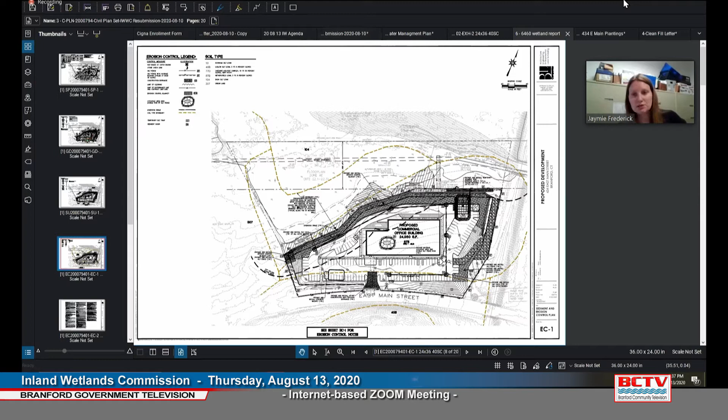Okay, so, Mr. Basserman, Jaymie, you said that in their document of August 5th that they didn't address the invasive species removal and its effectiveness? Jaymie Frederick, inland wetland agent. On the very last page, in the last paragraph, it goes over the written reports that will be submitted annually. And it doesn't specifically mention providing an update on the invasive management that was conducted.

Right, it's only the status of ground cover and the trees and shrubs. Got it. It outlines that it will do that work, but it doesn't outline that it will report on it. Okay, yep. Okay, so that can be added easily as a condition. So I think that then, do we want to do bonds for erosion and for planting? And that's always my favorite discussion.

Well, Commissioner Bassman, given the amount of shrubs and plantings that are going to be part of this plan and the different species, et cetera, it would seem to me that a bond to make sure that this happens and is successful is prudent.

Jaymie Frederick, inland wetland agent. If you do require a bond for the mitigation plan or enhancement plan or restoration plan, usually the process is that the applicant submits an estimate for the plantings, the monitoring, all of the various aspects of implementing the plan. As David Lord identified, the exact number of plantings aren't necessarily known. So it could be based on the number that he's called out in his plan. But you may want to add a little bit regarding the fact that the applicant shall submit an estimate to be approved by staff to the condition if you do move forward with the bond.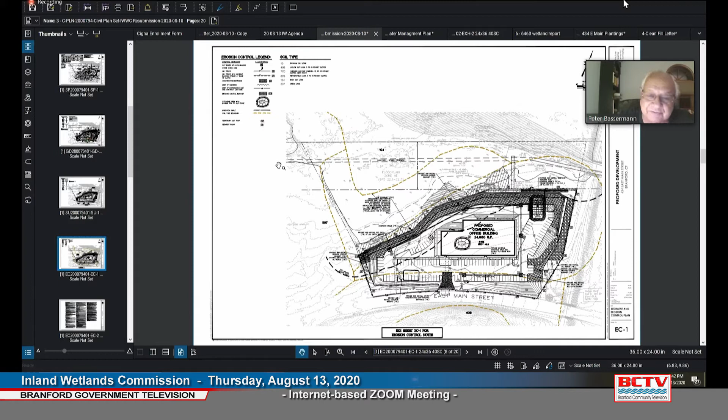Jaymie Frederick, Inland Wetland Agent. I'll kind of outline the request and then the applicant can fill in the support for the request. So there was a request submitted. The fee was originally calculated at $5,325, which is what the applicant has submitted at this time. After the upland review zone restoration/enhancement planting details were submitted, I identified that increased the area of disturbance and asked them to update the areas of disturbance as that would impact the fee.

The fee went up to $6,540.55. As Commissioner Rose identified, all of that additional disturbance is the applicant's attempt at trying to provide an enhancement area. Ultimately, the applicant is requesting that the fee be reduced to $2,500. And then I just added that there's also a $60 DEEP fee. The commission can decide whether that's part of the $2,500 or if they'd want to add the $60 or if they want any number in between the $6,540 and $2,500.

This is Commissioner Kraus. So what's the rationale for reducing the fee? Is the $5,325 not in line with the fee that we've charged other applicants? I understand why the increased fee to $6,000 plus might not be applicable because that's the area of land that they're enhancing. But what's the rationale for reducing the fee from the original figure to the $2,500 figure? And is that in line with other applicants?

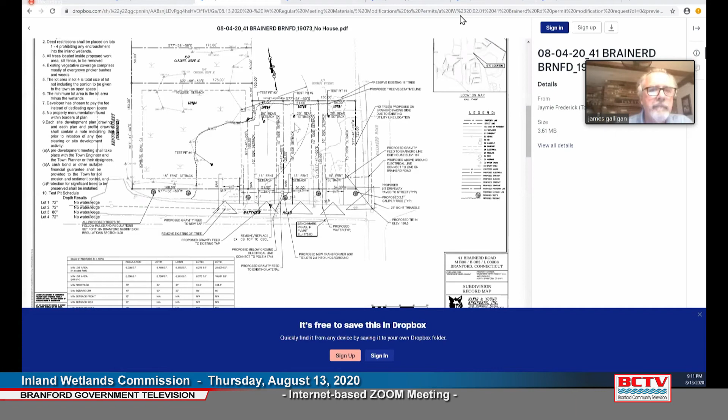So, Commissioner Bassermann, so is that a vote that's required on this, or as a modification, or what? Jaymie Frederick, the Wetland Agent: I believe a vote would be appropriate. This is Commissioner Boda. You've got a hand up over. Yes, thank you. Jim Galligan from Nafis and Young. Hold on one second. You've got to wait for the chairman to recognize you. I wanted to make sure he saw you. Consider yourself recognized. Thank you, sir. Yes, Jim Galligan from Nafis and Young.

We're proposing no change whatsoever to the activity on this application. It's simply a minor modification to lines between lots 1 and 2. We're not proposing to change any of the construction activity, any of the sequence of construction, any of the filling or excavation. There's no change to the physical activity on the application. Commissioner Bassermann: thank you for the clarification. Thank you, sir.

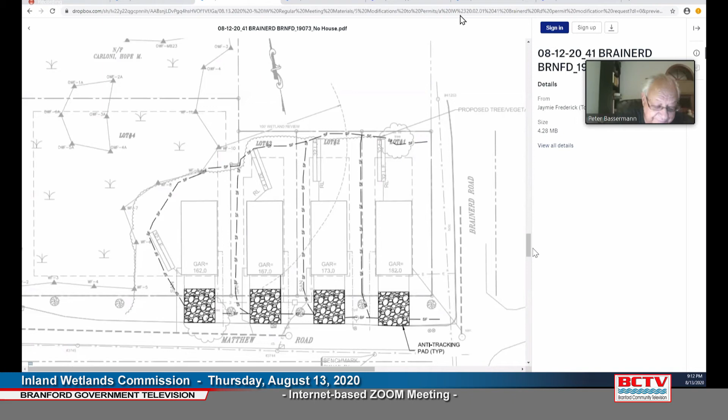Any further discussion from the commission on this modification? Do a roll call vote on the consideration of, I guess you would call it an administrative change of the lot lines. Commissioner Kraus? Aye. Commissioner Boda? Aye. Commissioner Sullivan, aye. Commissioner Begeman, aye. Commissioner Rose. Commissioner Rose, aye. Commissioner Grinall.

Did you hear my vote? Aye. I did. Okay. Commissioner Bassermann, aye. Aye. I think that you got everyone, Jamie. Jaymie Frederick, the Wetland Agent. Did you ask Commissioner Begeman? I did. Then I heard an aye. Okay, and then we're into now the applications for receipt this evening. Thank you all very much. Yep. Appreciate it.

Jaymie Frederick, the Wetland Agent. Before we get into the applications for receipt, there is another modification regarding the subdivision that the applications for receipt are from. Okay. Inland Wetland 19-1005, 99 Todds Hill Road, modifications for planning and zoning approval. So 5 applications were received regarding this subdivision. I realized there were some minor modifications to the lot lines as part of the planning and zoning approval.

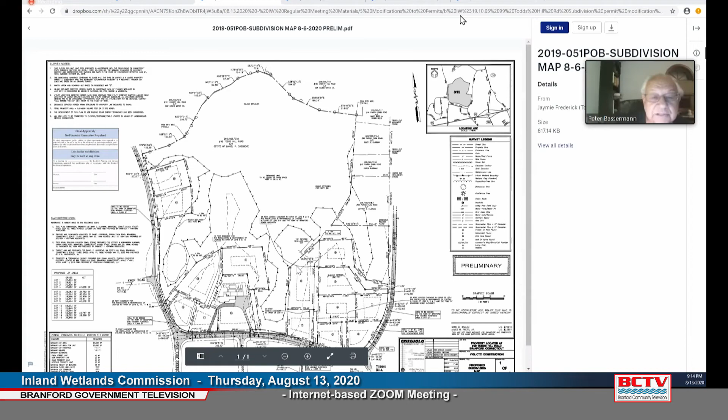The largest differences were pertaining to lots 8 and 13, which both increased in size. However, looking at the planning and zoning subdivision grading plan and the site plans that were submitted as part of the applications for receipt, the limits of disturbance do not extend into those increased lot areas. So can everyone see the subdivision plan? Yes. So this is lot 8 right here. The lot line that was wetlands approved went straight across right here. So this triangular section on the top was added. There's no proposed activity for the development of lot 8 in that area.

However, the driveway access to lot, I think it's 6, was to come off of Parish Farm Road, and it's been adjusted so that it comes through lot 8. So there will be a minor activity there later for the access to that lot, but that will prevent the driveway from going immediately adjacent to the wetland in this area. So it actually, in my opinion, pulls the activity further away. And then the other lot that increased in size is lot 13. Again, the property line used to go right here when wetlands approved it, and it's been extended in this area here.

Other minor modifications were that there was some added area to the right-of-way to help with right-of-way width issues. So there's a minor reduction to the overall open space, but it's still in excess of what's required for planning and zoning. Commissioner Bassermann: Jamie, do I then assess this as no impact on wetlands with these modifications? Jaymie Frederick, the Wetland Agent: there's certainly no direct impacts, and I don't think that there's any significant changes in regards to the proposal.

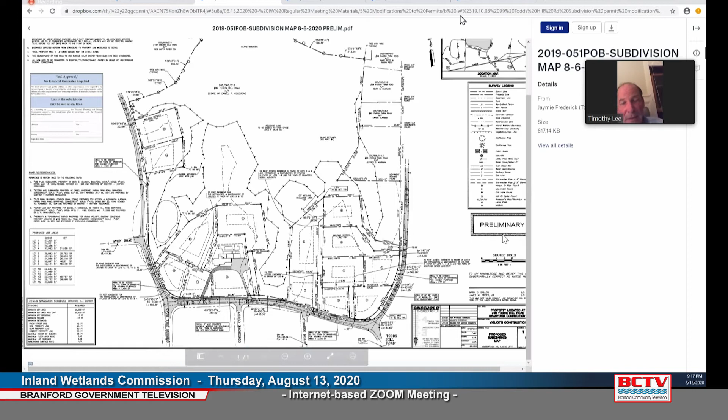The changes resulted from the application to planning and zoning because there were some slight modifications through the planning and zoning process. We ended up getting kicked back to wetlands for those modifications. But as Jamie mentioned, they are relatively minor in nature and won't have any direct impact and probably no indirect impact either. Commissioner Bassermann: are all of the modifications results of changes that P and Z dictated? Timothy Lee, that is correct.

Any further questions from the commission? Let's see, I guess we do a roll call vote on this as well. Commissioner Bassermann, yes. Commissioner Kraus? Commissioner Rose? Aye. Sorry, I couldn't unmute. Commissioner Begeman? Aye. Commissioner Sullivan? Aye. Commissioner Boda? Aye. Commissioner Granolf? Aye. Okay. I think we have enough votes to move this thing forward.

Application for receipt, Inland Wetland 200801, 99 Todds Hill Road, Lot 9, construction of a single-family house. I guess, Mr. Lee, the floor is yours. Thank you. Once again, for the record, Tim Lee, the attorney for the applicant. With me is Jeremy Gannon from Criscuolo Engineering. Can you hear me? Yes. Okay.

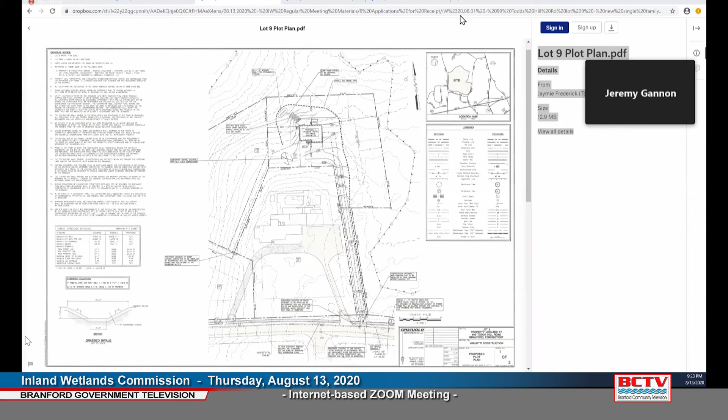Jaymie Frederick, the Wetland Agent. The only change in the upland review area was the addition of silt fence along the driveway here to protect this wetland area. I think the applicant would like to request that it be handled administratively unless the commission wants to further review. Yes, this is Tim Lee for the applicant. It is our request that the commission take action on this application tonight as the changes are relatively minor. Jaymie Frederick, the Wetland Agent, just to clarify, the application is for receipt, so the commission cannot make a determination tonight. However, if they determine that it's minor in nature, they could hand it off for agent approval. Thank you.

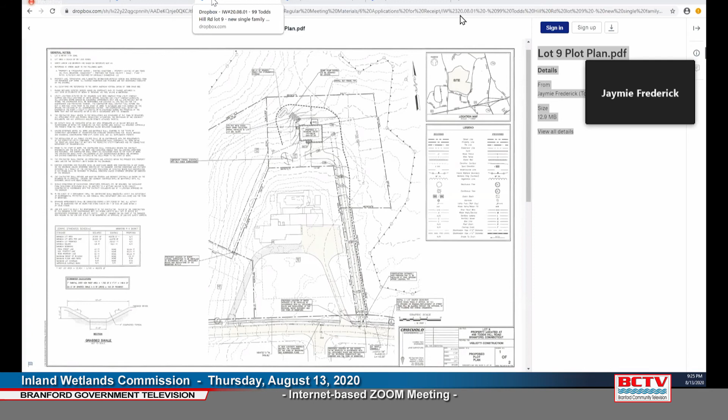Commissioner Bassermann: I don't see any reason why this can't be done administratively. Does any commissioner feel otherwise? This is Commissioner Boda. I don't see a reason why we wouldn't do it. I agree. Commissioner Grant Alch, I agree. Administratively is fine. Commissioner Begeman, agree, administrative approval. Commissioner Bassermann: Jamie, is that sufficient, or do we need a roll call vote on this? General consensus is sufficient. Jaymie Frederick, the Wetland Agent. Great. Okay, next up, inland wetland. I'm sorry.

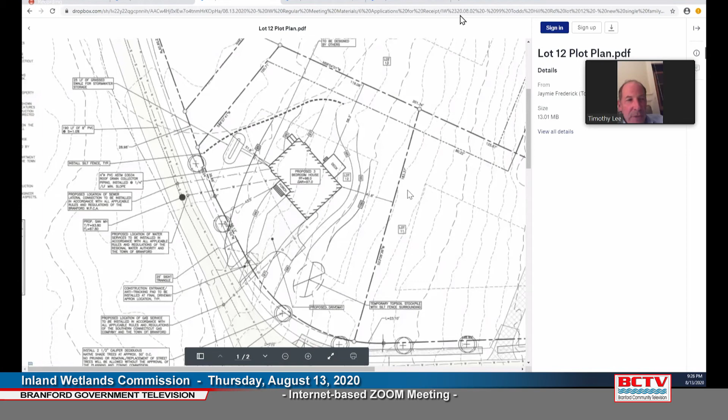Next up, application for receipt, inland wetland 200802, 99 Todd's Hill Road, lot 12, construction of a single-family house. Once again, Tim Lee on behalf of the applicant. Jeremy Gannon from Criscuolo Engineering is also here. This lot actually has less activity than the lot we just talked about. All the changes are located outside the 100-foot upland review area. I'll turn it over to Jaymie.

Jaymie, if you could just highlight what the changes are in this version of lot 12 as opposed to the prior version of lot 12. Jaymie Frederick, the Wetland Agent. The entire disturbance on the site is outside the 100-foot review area. This is the 100-foot review line right here, and you can see that the silt fence pretty much parallels it. The largest difference is that they added the temporary stockpile location and they added the drainage. Drainage will be roof drainage. This one seems pretty appropriate for agent approval, in my opinion.

Commissioner Bassermann, I think this cries out for administrative approval. Anyone feel different? Commissioner Grant Alch, I think administratively is fine. Is that the general consensus of the commission? Yes, this is Commissioner Boda. Commissioner Sullivan, I agree. Thank you. Commissioner Kraus, I agree. Thank you. Commissioner Begeman, agree.

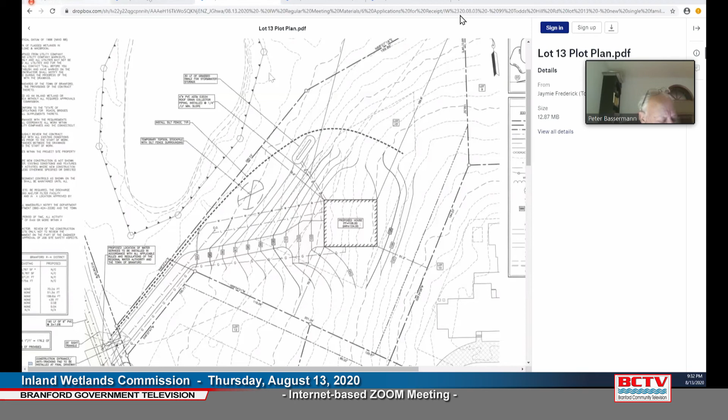Do we still have people? This is Tim Lee on behalf of the applicant again. Once again, it's our request to have this property dealt with administratively if the commission thinks that is appropriate. This is Commissioner Bassermann. Any commissioner have reservations about this being done administratively? Hearing none, it looks like inland wetland 200803 can be done. Yes? No. Can be done administratively, agent approval.

Inland wetland 200804, 99 Todd's Hill Road, lot 15, construction, single family house. Once again, Tim Lee on behalf of the applicant, Figliotti Construction. We have the routine down now, so I'm just going to turn it right over to Jeremy to discuss the differences between the current version of Lot 15 and the version that the commission approved as part of the application last December. Jeremy? Yes, very similar to Lot 13. Lot 15 had the same instance where the footprint of the building had changed. Amy, this is Commissioner Boda, could you pull the map up, please? Thank you.

Yeah, so with Lot 15, the footprint of the building had changed slightly from what the prior subdivision approval had entailed. This one, we've tried to keep it as tight to the setback line as possible without crossing it. In addition, we've provided the grass swale. Once again, this was just slightly bigger in roof area, so it required 26 linear feet as opposed to 25 at the ones before. Sediment controls, we've reinforced those and extended them, adding additional hay bale backing along the area due to the contours, the grading.

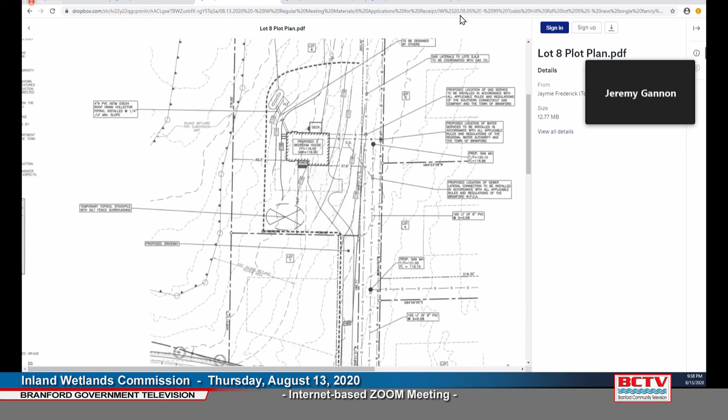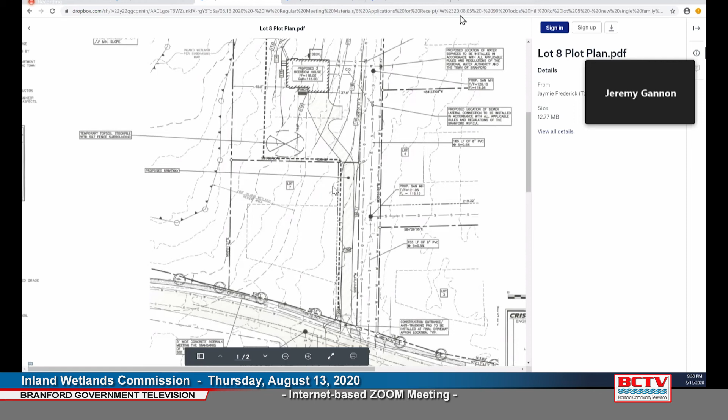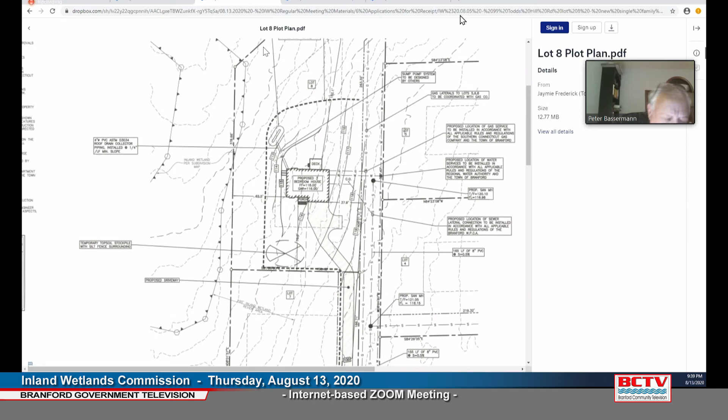This is Commissioner Bassermann. I think I understand the grass swale improvement. I guess what was the prompt? What was it that prompted you to add the erosion controls? We added them along the driveway just to protect lot 7 as well as the wetlands downstream. Okay. Commissioner Bassermann, I would agree this is ripe for administrative approval. Commissioner Granolch, I agree. Are there any dissenting votes? Great. No. Thank you very much for your input, gentlemen.